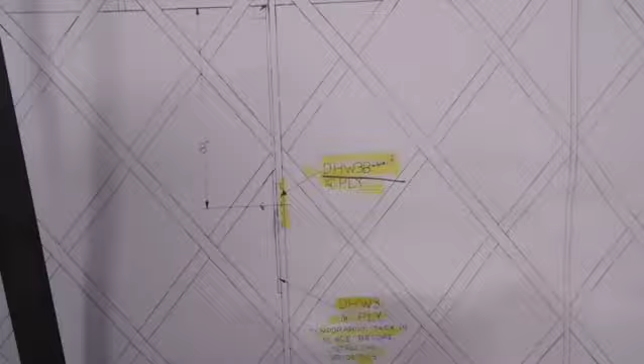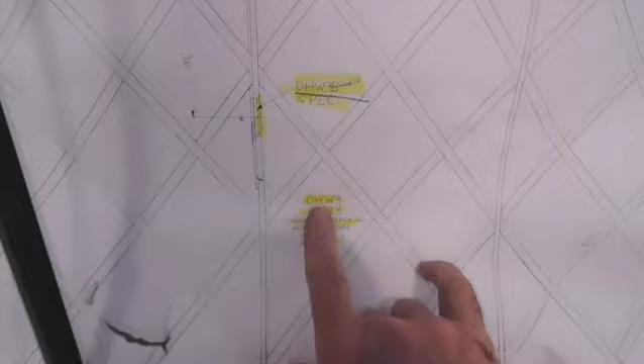At the planning table. That's the wing. And the only mention of DHW3B and DHW3 is on this plan.

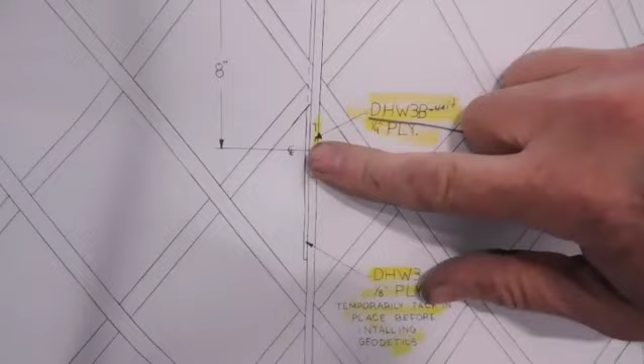1/8 ply temporarily tacked in place before installing geodetics. So what that does, along with the little piece of ply there, supplies support to the torque tube for the flaps. It's not mentioned in the write-up at all, and it's not mentioned on the other plans. This is the only set that actually has that.

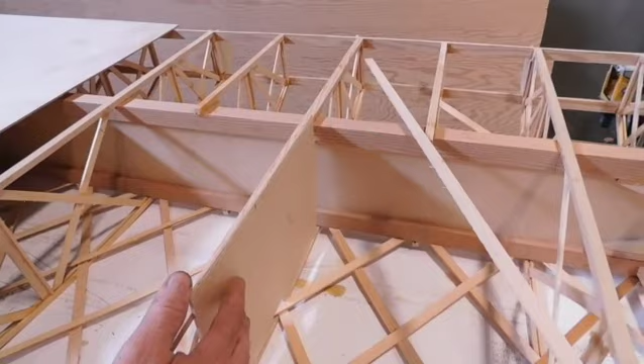So here's what happens with that. Got the wing over here. There's a little piece of ply that just goes in here. Now, it doesn't mention how to do this or anything. I looked on Danielle's plans and saw a picture where she cut it around the geodetics. So I've got the top geodetic in, and that's on the bottom.

And then I'm fitting this piece in like that, so I have to notch around the geodetic there to get that into place. It's DHW3. So I've got that notched into place.

Then I have to try to figure out where the top geodetic is going to go. So I put one on here loosely about where it's going to go, and then I put it on the other way to figure out loosely where it's going to go, and I've got those marked. I'll cut out that little bit, then I can glue this into place, then I can glue the bottom geodetics into place so I can get my washout done on the wing.

But you have to put that thing in first, and then somewhere in here there's going to be a cutout for the torque tube itself. So the hole for the torque tube, and then there's going to be that other little piece of backing on there, 1/8 or 1/4, to add more backing on there. But we don't know where that goes until you're getting ready to put the torque tube in where it's supposed to go.

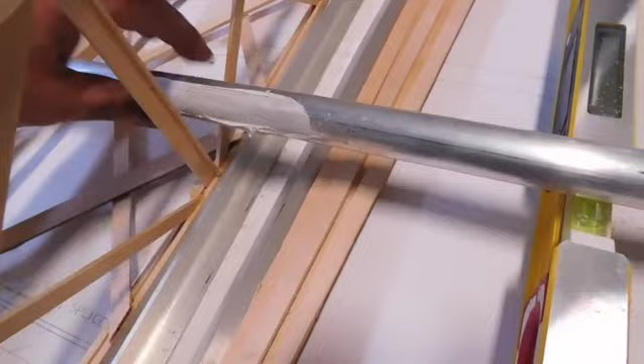When you have the plywood on the end of the wing there, you're going to have a hole in there at the same spot. The same kind of bushing will be on there, and it's going to move to wherever you need it to glue it into its final position. That's what I get from the plans, because it really doesn't say anything in the plans. The only thing mentioned is refer to the print and note the position of the outboard flap torque tube support and the inboard flap tube torque support. These are now glued and clamped in position for drying, and that's it.

So I'm assuming they mean that big piece and the piece that would go here, but not the small piece, because they say to wait on the drawings. They say wait until the wing is fitted to the plane for the final placement of the DHW, whatever these little supports are, the bushings. So that's what we're going to do anyways.

I'm going to glue that one into place. I'm going to put a 1 1/4 hole in there, centered where it's theoretically going to be. Then when the wings are all fitted, we'll put in the torque tube bushing and glue it into position to hold that torque tube exactly where it's going to go. Since it's mounted onto the plane, there could be a little this way or that way, and you want it exactly right so there's no binding on there, since it's not a bearing or anything, it's just wood. So you want it as perfectly straight as possible, I'm assuming, because again, the plans don't tell you at all.

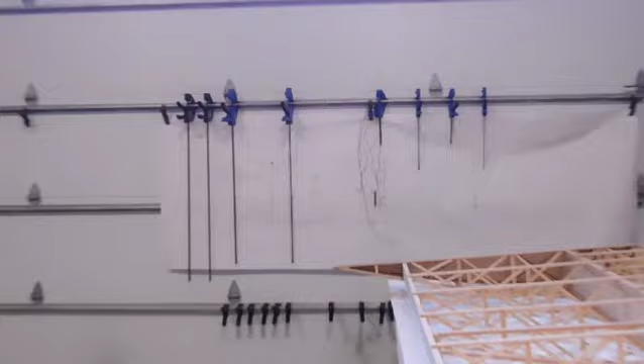DHW3 is in place, and also had that little block in there as well. Again, it's not mentioned on the plans. It's not mentioned in the instructions. The only place you see that block is on that one set of plans. So unless you're looking specifically at that one when you do these things, you wouldn't even know.